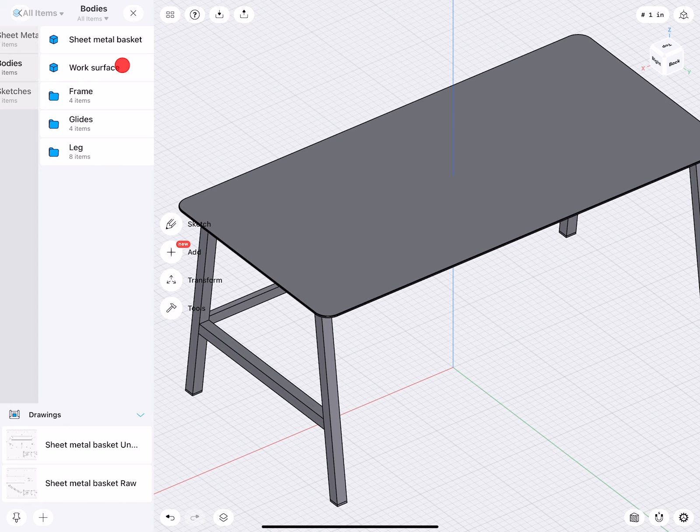Hello everybody and welcome to this tutorial. We'll take a work table like this and under the work surface create a nice and beautiful sheet metal basket. Then we'll make a copy of that basket, move it away, and guess what? Correct, we are going to unfold it.

I'm going to show you in this process video a fairly easy to set up and surprisingly well working manual method for how to calculate and unroll this geometry into a flat pattern. We can then take this flat pattern, load it into the drawing, and send it out to a metal shop to create a physical representation of this digital design. And all that, of course, in Shapr3D.

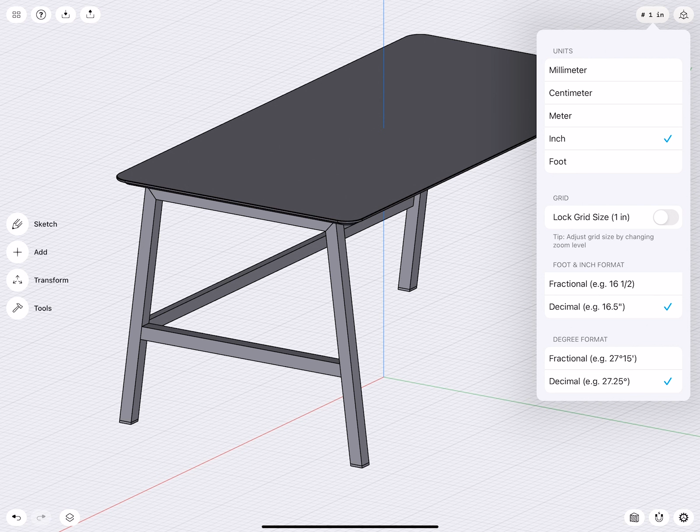So here we have the simplified model. As you can see, this is just the table without the basket, and all the sketches are gone, so this is a nice and clean design to work with. The unit system is in inches, since this design was made in inches, so it makes sense to remain in that unit system.

I will turn on all my snapping elements, and we would like to start by going to the right view, centering our table, and then we turn on the section view, because now I can see through the table. I would like to have the metal basket on the left side, being flush under the table surface and running along this metal frame that sits under the work surface.

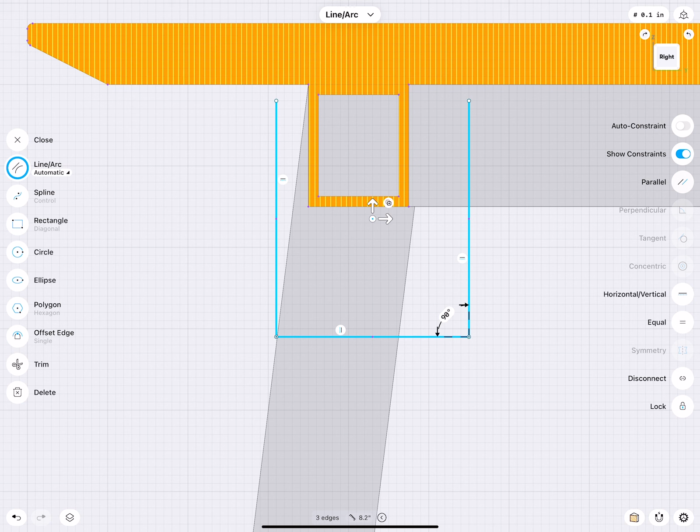Somewhere I start drawing a few lines like this. I can select these 3 lines, make them horizontal, vertical. They all should be 4 inches. I select them all together, say equal, and say this should be 4 inches at this dimension. Now I can bring this into position.

If you take a look at the geometry of my cut section of the table, you notice that after we started drawing our first line, we started getting these interesting magenta points. These are snap targets, where the sketch intersects with the geometry, and there I can snap to this point.

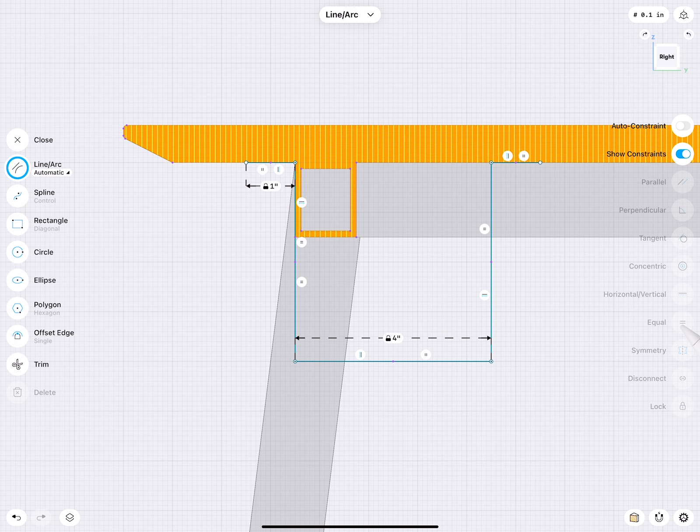Perfect, easy positioning. One line to the left, 1 inch. Very good, one line to the right. Both lines horizontal and vertical, and both lines being equal. Very good, perfect. So now we have the position of our first sketch created.

This sketch defines the inside surface, so we need to create the material thickness. For this exercise, we try to work with pretty thin metal. So we go to Edge, select all 4 lines, and then we extrude this out by 0.04 inches, really thin. Come back to line, and then we close this.

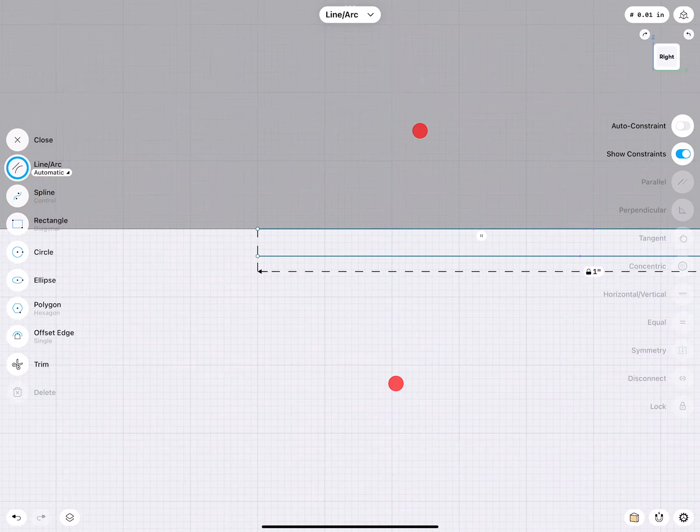Beautiful. By having this sketch now closed, what I can do is go into a 3D view, turn off the section view, look from below, zoom in, and select the sketch profile. There we are, and then extrude the amount of metal out I would like to have.

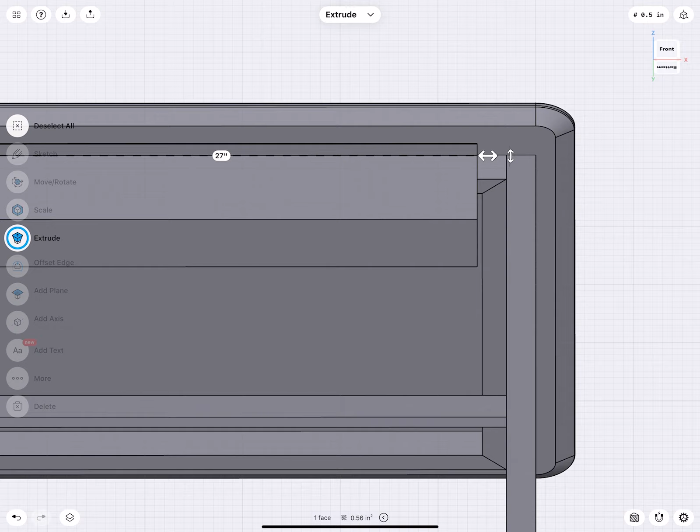Here this would start hitting the metal frame, so let's say this should be 26. Very good, let's do the opposite side. I select here the face of the basket. So 26 multiplied by 2, that's 40... 52. I just enter the number. Beautiful, so there we have the basic basket, but it's solid.

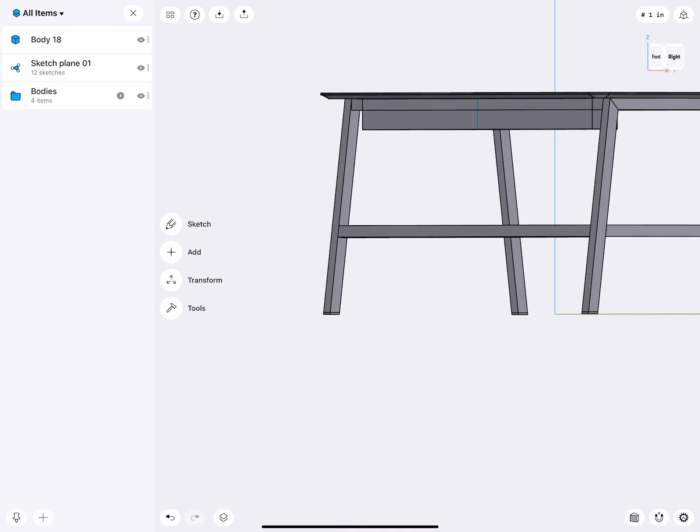I need to have openings. With the openings, because this is also folded, we want to make it from the back nice and stable and from the front nice and accessible. So before we continue, let's make sure that our metal basket and the sketch are outside the bodies folder. And it is.

This here is my outside face. I will select it with the pencil, with the finger, double tap. I can zoom onto it. If I want to turn on section view, then I can look through it. And now I can do the following.

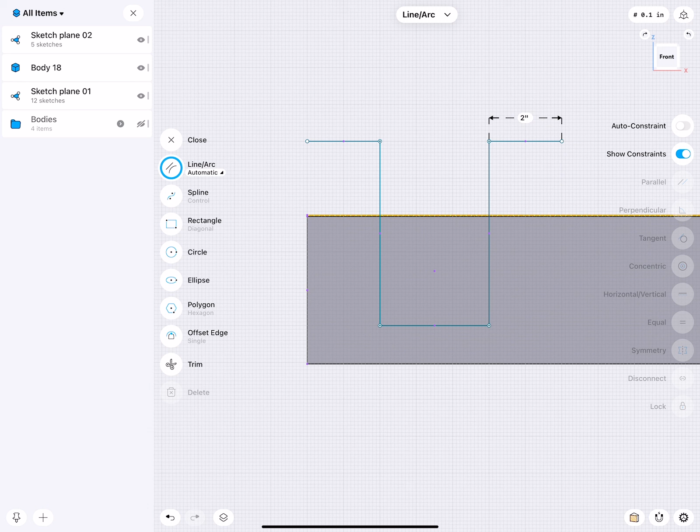How much is this? This is 1 inch. So I will draw here a line 2 inches in, and you see that this lines up with the left edge. Then I can bring this down, bring this over, bring this up, 2 inches over, bring this down. Very good, bring this over, bring this up, and 1 inch, 2 inches. This should be.

These three I can all say equal. Very good. This point here I do not want to move, so I will lock it. These two lines I will make tangent, so they are at the same level.

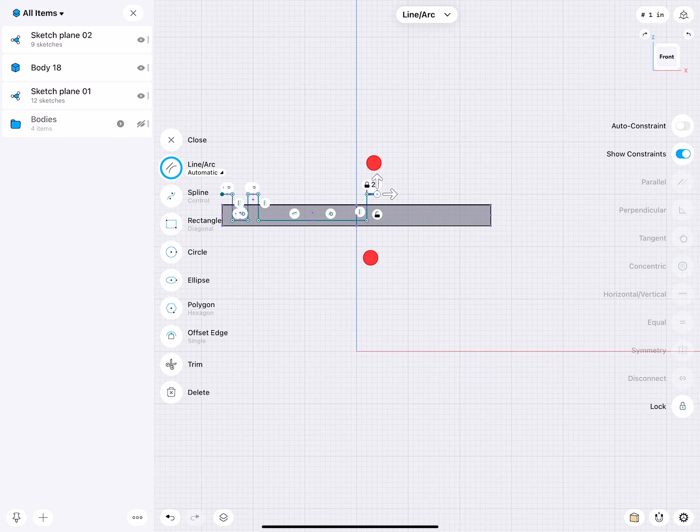Now this point I will move over, and before I do this, let's actually undo the step. Select everything and make sure they have horizontal and vertical constraints. Now when I bring this over, this deforms correctly.

Also here, because I work with nice clean inches and model along the grid, I don't need to project an edge from here into the sketch. I can simply use the grid and align this perfectly, like this. This is good.

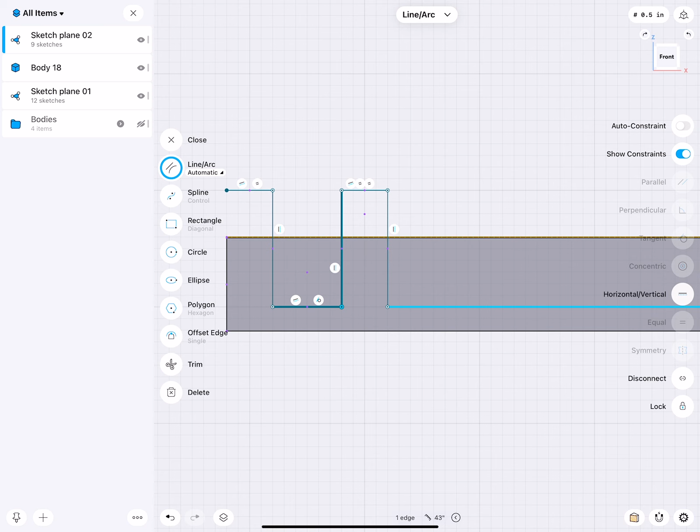So when the 3 top lines are 2 inches, it's actually defined. I can select these 2 lines down here and simply say make those equal. And by doing this, as you can see, beautifully, it's centered, everything. That's a really effective and nice sketching trick.

So this is done. That is actually really good. The last thing I will do is I will add a line here and a line there.

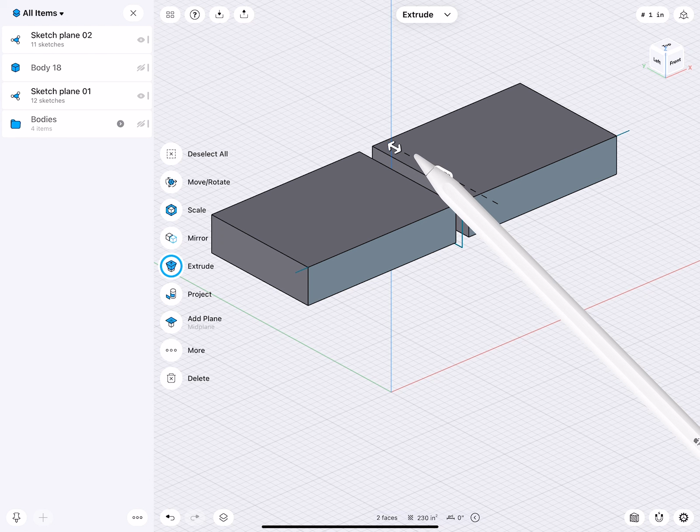Main reason for that is I will turn cut section off, and I will turn this body off. Then I will select these 2 faces, extrude them out a little bit, and push them over to there. So this is actually much wider and runs through the basket, as you can see. Very good.

Now, let's give objects a name. We call this sheet metal basket raw.

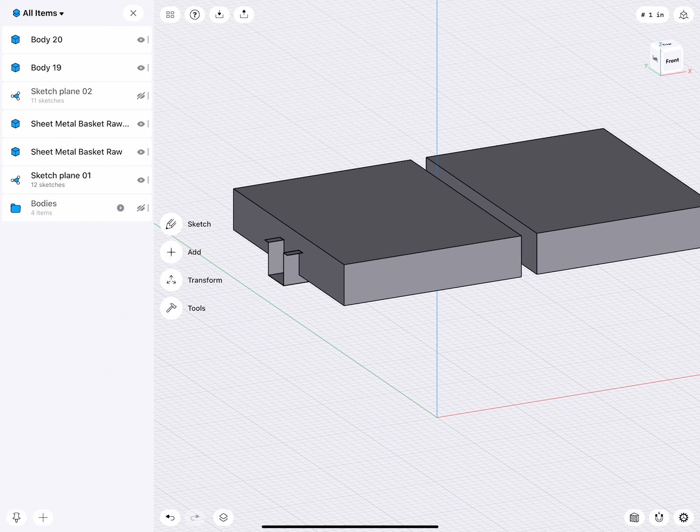Very nice. Okay, so from this piece, I would like these 2 objects to be removed. So we can go subtract, keep bodies, and actually keep originals all, and click done. So here are my 2 elements that did the cut. Here is the raw piece, and there is actually the piece where we cut everything from.

And we can change the name simply to sheet metal basket.

Very good. Okay, nice. All these elements here I will select and put for the moment into a different folder. Just call this sheet metal or however you would like.

So again, this is the outside and then this is the inside. And now this is a design question: how many of these vertical posts do I really need? It's also pretty thick material.

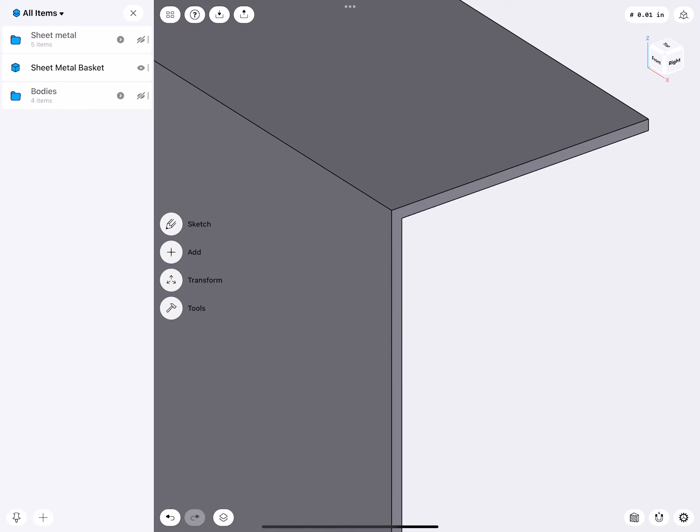Maybe what I will do is I will select this face and extrude and clean up the center part. So from the inside, I have a much nicer and bigger open area, easier to access. Very good. Yeah, that looks pretty good.

Okay, so what's the next step? We can actually add a few roundings. When this has a material thickness of 0.04, let's do the rounding then here too, 0.04.

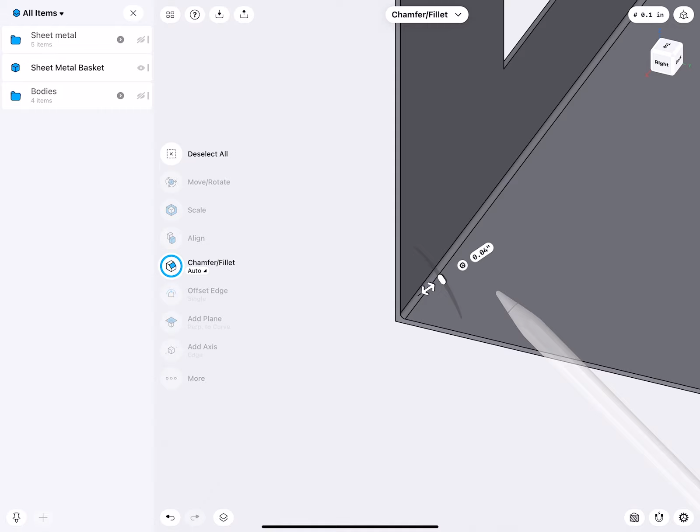So we make a small crease, not too big. Let's do the same here, 0.04. And then that means that this one is 0.08. That's the inside radius plus the material thickness.

Okay, very nice. Do we like this? Let's see. We make this 0.08, a little bit bigger. Then this would be 0.12.

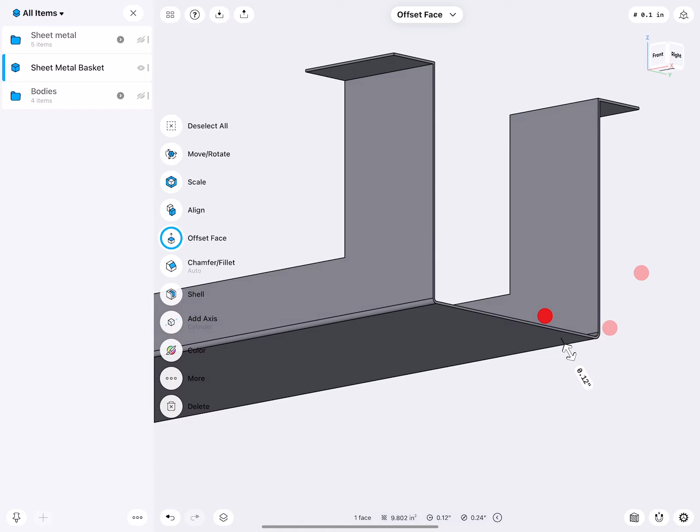Maybe this looks nicer. Keep in mind this is metal, and we can actually bend this not necessarily around a super sharp corner. Oh, we can, but then it's very sharp. We want this to be soft. So then, because we did this at one position, we have to do this also on all these other positions here.

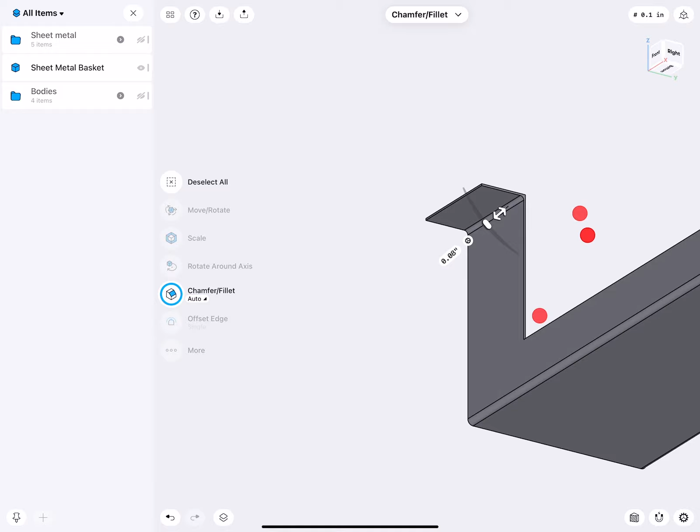0.08, there we are for the inside. Same here. I try to work in tandem, meaning I work on edges that use the same value, and now I'm going to round these edges which will have the bigger value.

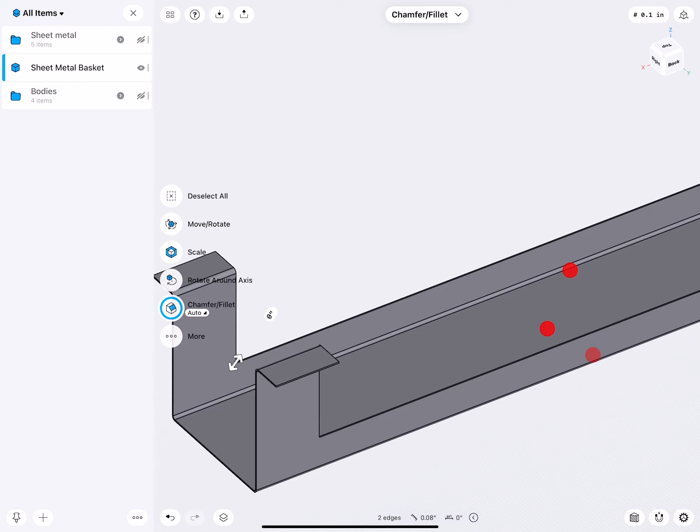Very good. Okay. This is a little bit of a cleanup and styling, particularly with metal here. Sharp corners are not necessarily that good. We will round those a little bit.

So you see, 3D modeling, sheet metal is quite fun and easy. It's very step by step. Let's give this an inch of a rounding. This is too big, half an inch.

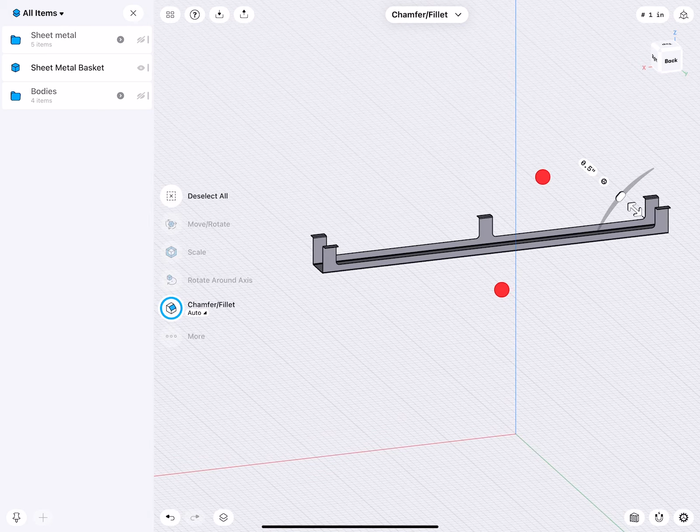That's the beauty of 3D modeling in Shapr with the direct modeling kernel. We can adjust everything so easily. Very good. Okay, so this piece nearly is done.

Now we need to figure out also how do we mount this. We have all these faces, and on these faces we can create a sketch. So I select this face with a finger double tap, and because this is a rectangle, it finds actually the center point. Go to circle and add a nice big rounding.

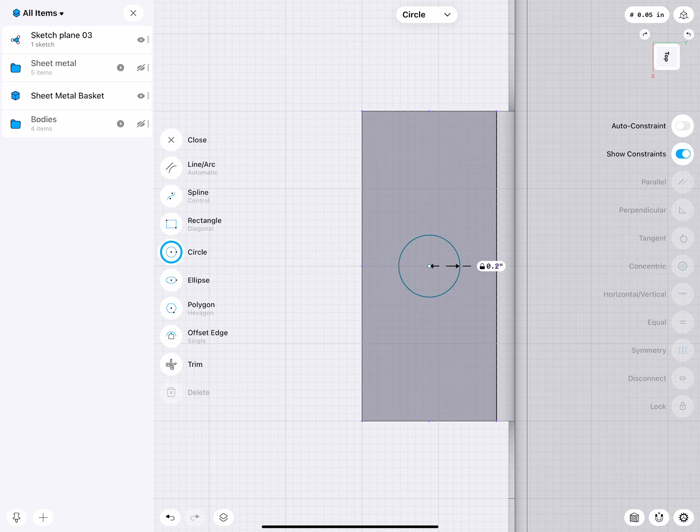So here the question now is, how big do I make this hole? This is a big tip because we're dealing with sheet metal, which bends on its own. It's not razor sharp like a block of steel which we mill with a CNC into a very precise shape. So we want to build in a little bit of tolerance. 0.16 of an inch is actually not too bad, but we can make this a little bit bigger. 0.19, or let's go with a clean value there. A little bit bigger. Obviously the screw that goes through it is smaller, but this gives us a little bit of wiggle room.

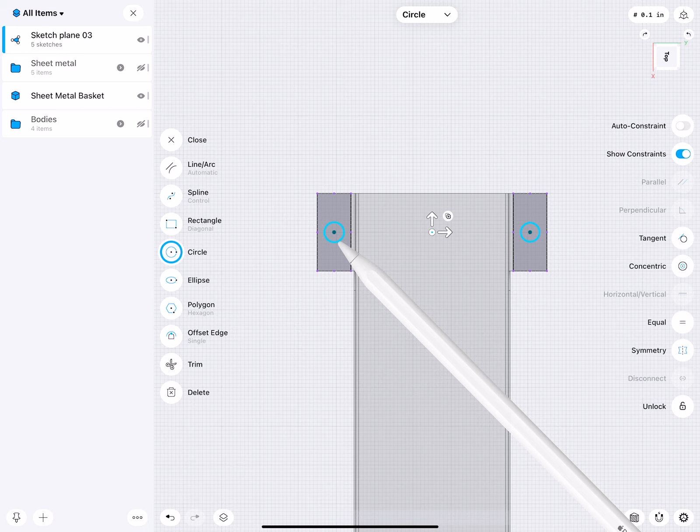Okay, so here now we can go ahead and do the same. There we are. All these rings, by the way, I can lock, so I can't really change the position. And to make designing nice and easy, I set them all to be equal. Then here and there, lock, lock, and then these two, I can go to here and also say equal. So when I make this 0.1, you see they all update too. Pretty nice, no?

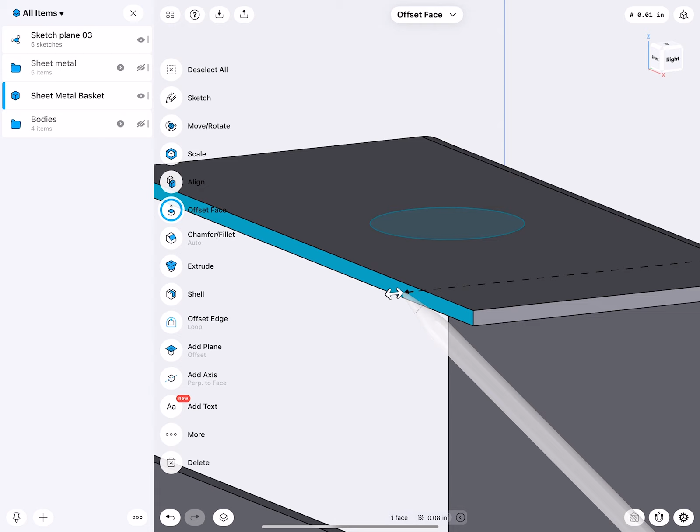What about 0.25? That is definitely too big. Okay, so this should be enough material to actually hold this basket right under it. This is a little bit wider on the side. Here, this is actually pretty good. We could extend this if we want, this is up to you, because only because we made one sketch doesn't mean that we are stuck to it. We could move this further out, but I leave this where it is.

This feels pretty good. Okay, so with these circles, we can select them, and as you see, select the fill with the pencil, push down, and I extrude through the sheet metal and cut the holes. So easy, it's really nice. And then here, the sketch, I can call sheet metal holes and put this one into there. Very nice. By the way, here's a little tip.

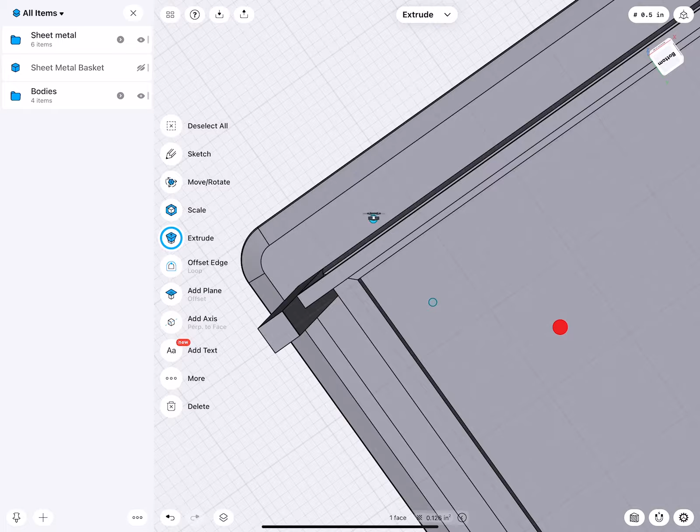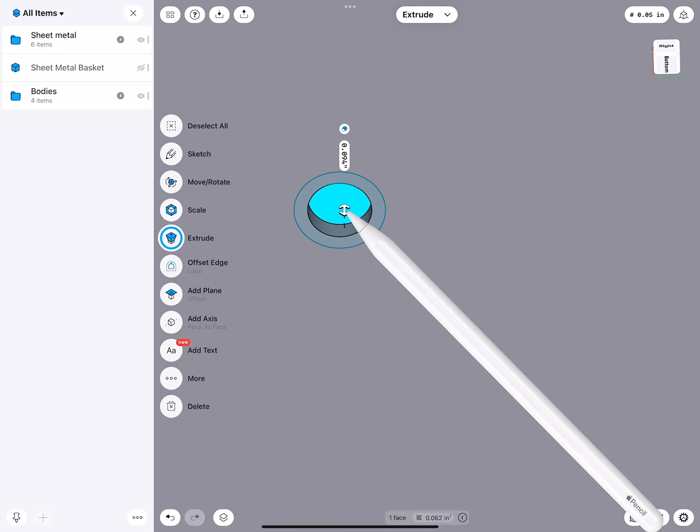Because I have these sketches, I can also find the positions under my work table now and do holes right into there too. Now this is not a very thick work table, so ideally I want to have some sort of socket where I can put a bigger screw and thread it into it. But I think this is very good to know that I don't need to find new positions. If I would like to have a smaller hole, I could simply in this sketch create a new and smaller ring, maybe for a drill hole. And then this one I select and cut into my work surface. So it's kind of like one stone catches two birds. Sorry, birds, I love you.

Okay, very good. So what else can we do now? The sheet metal basket is basically done. And I mentioned that I will show you a manual way how to unfold now this construction into a pretty precise format so that we can put this into your drawing. This design I will select, double tap and make a copy and move it somewhere else. And then I bring this one to there. Very good.

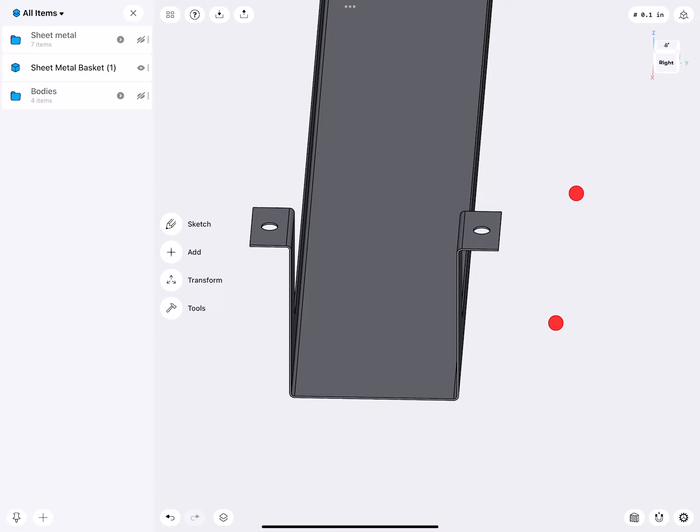Very nice. So the task I have now is I need to figure out how do I have to unfold it. And when I unfold it, I will have flat surfaces. That is very good, like here. And I need to figure out where is actually the crease, so where is the midpoint over where I'm going to bend something, and what's the bend allowance. Now, for example, here, bend allowance - everybody who's familiar with sheet metal will understand what this means.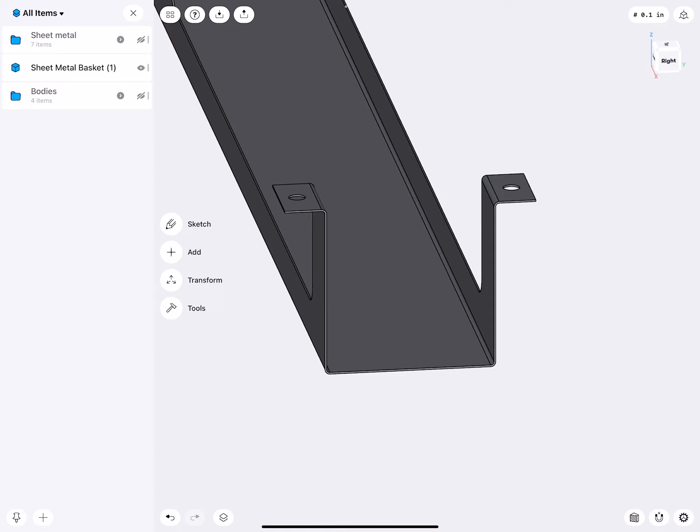And there are methods to calculate it, but because this is such a thin material, you could, but honestly, once we actually take sheet metal and start cutting and stamping it, it won't be that super precise anyway. So this process, which I'm going to show you right now, is totally perfect, and it doesn't require actually any higher math, no formula. So what we will do first is I will select this one more time and I make myself a copy right at the same position there. And then I will select here all these edges there, and the same here.

Go to offset edge and offset this by 0.02, so half the material thickness. That's kind of like the center line.

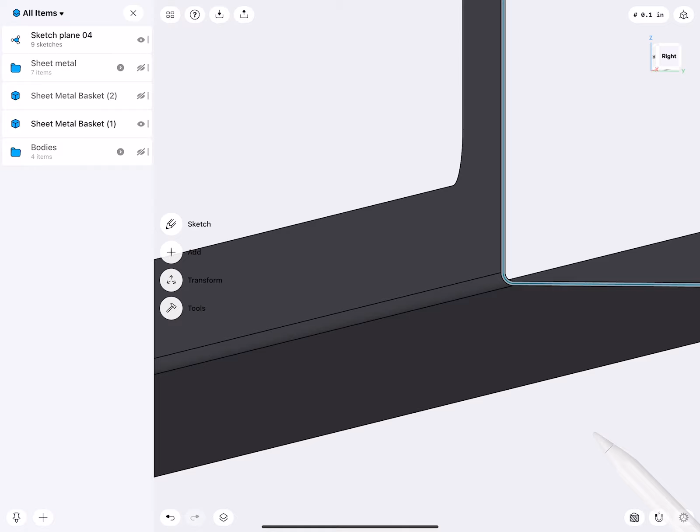What is really useful about this trick is, here now I have actually the length of one piece. Here I have the length of the next piece. And this piece here in between is actually kind of like the length of the sheet metal that is in between the two flat areas.

Here the metal will be compressed and here the metal will be stretched. And the trick is that now this piece needs to be as long plus this radius, or half of this radius on each side. And that actually is really it.

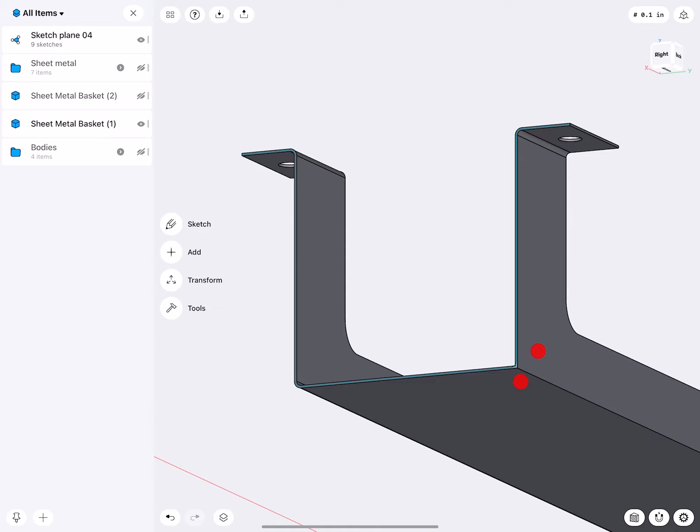Before we continue, however, I need to remove all these carefully crafted roundings we did here. And this goes pretty fast. And there we are. Let's go to here and there. And the last one. Very nice. And here. So, perfect. Okay, good.

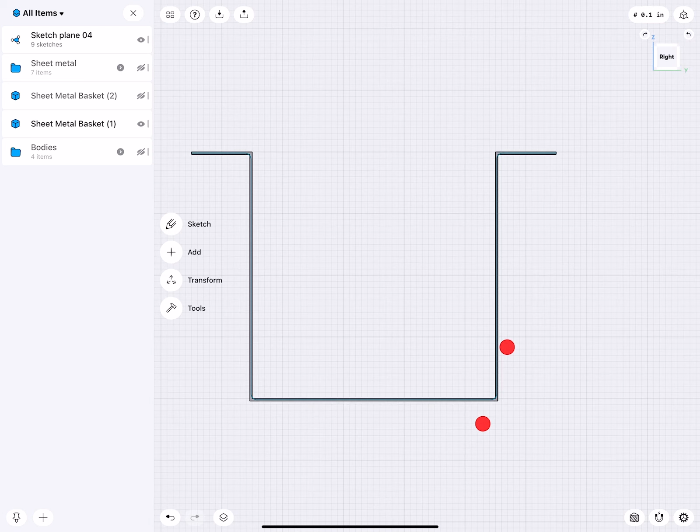In the next step, we are now going to unfold this whole design, and then we need to reposition some of the edges. To unfold it, we can start, for example, here.

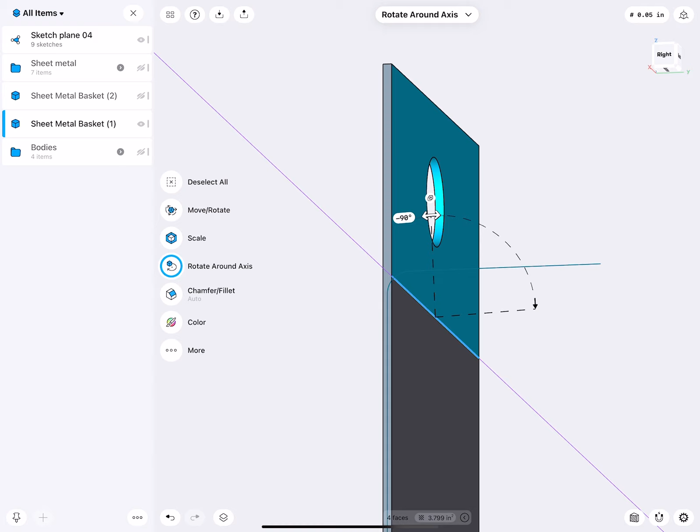I will select all the important edges, so the top, the bottom, the circle, and actually this endpoint. Then I can select this edge and bring this over 90 degrees. Very good.

Let's do this one more time. There, inner edge, and 90 degrees.

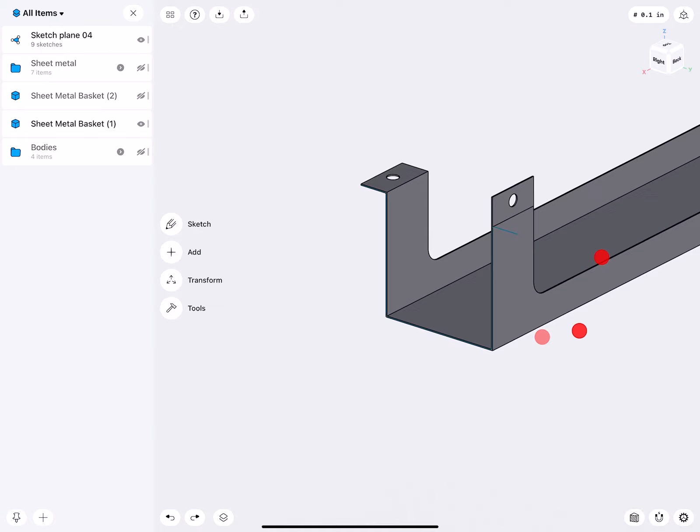Beautiful. If you do not select actually this set of faces, let me show you what happens when we select only this. So there you can see we are rotating these faces, but the rest of the geometry, so the hole being cut, remains in place and adjusts. So that's the reason why it's important to select all those faces.

Then in the secondary step, we have now to unfold this whole piece. Also here, this face I need to select. The fillets, they're probably not really, they will actually move with it. We don't have to really select everything, just the important faces which could deform.

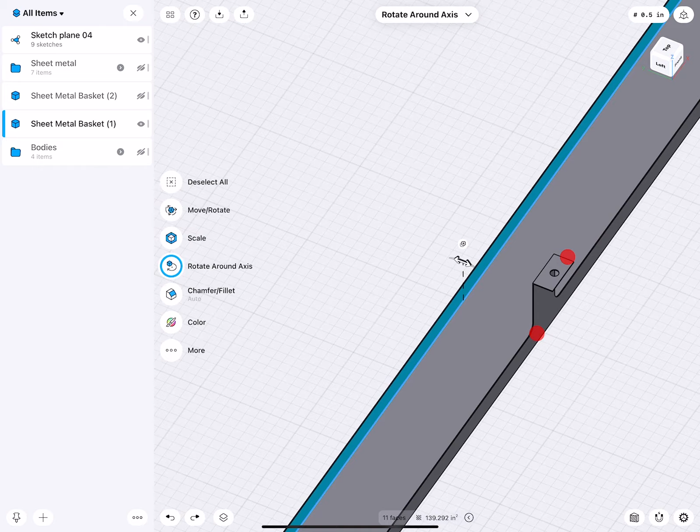Now to figure out what actually we have to select, you will see once you rotate something and it does not rotate or unfold the way how you expect. So what about this? Yep, this actually works really good. Beautiful. There we are. So this was actually part one.

Let me very quickly do the other side. It's actually a very good practice.

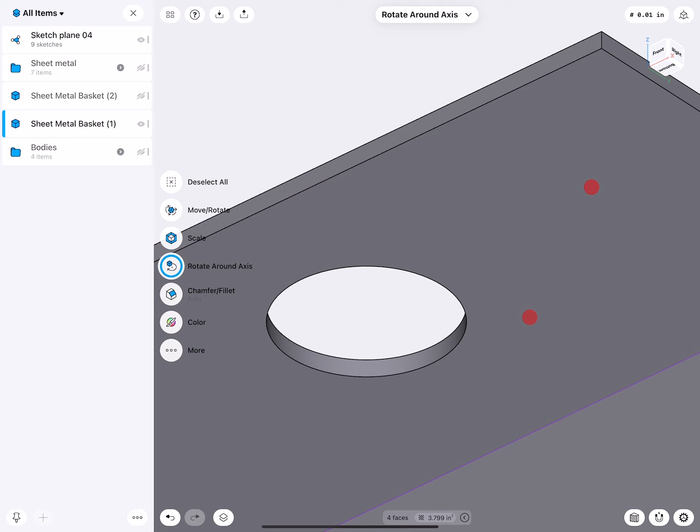There we are. And now this one. Oh, be careful with how you select your pieces. This should be 90. There we are.

And then we select everything here one more time. Go to here, select everything there, including this face too, again.

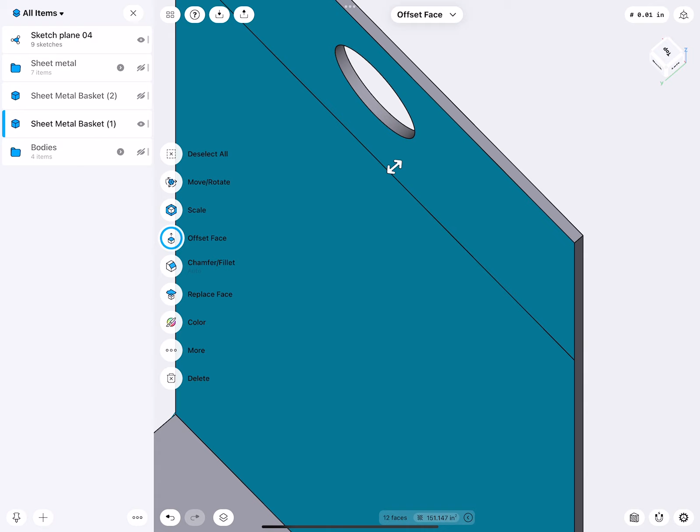And you see me zooming in and zooming out a lot. That actually is a very useful process, so when you select something with the pencil, not by accident do you select something you do not want to.

Oh, so there actually I got an error warning. That means somewhere, by the way, I did not select everything correctly. There. Very good. So we have actually now the piece flat.

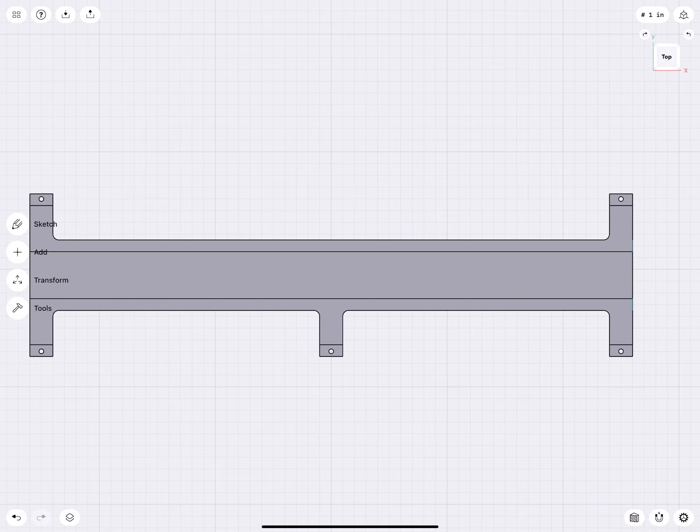And now we need to figure out how do we have to reposition some of these edges, and what does actually edges mean? You see, when I zoom in and I turned on the show hidden edges, here's some of these edges, they are not at the same position.

And because this is sheet metal, material being stretched and compressed, this will grow along here and here just a little bit. And we'll show you now how we can do this.

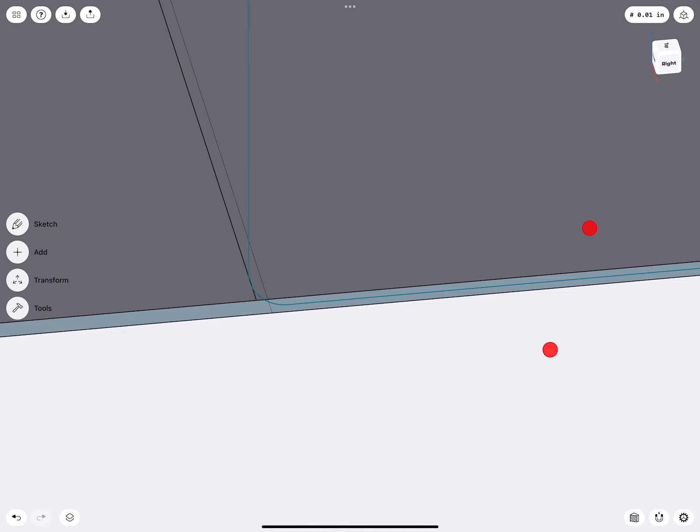To do this now, we will go back and take a look at our sketch here one more time. So this tells me this is 3 inches and 84. And then here, this arc has a length of 0.1507 inches. Okay, good. So how ideally do we do this now?

I will select this face because it's going to be the easiest one with a finger double tap. Then I zoom in a little bit. And then here you see there's a midpoint. I draw a line there. There we are. And then I can actually find the midpoint.

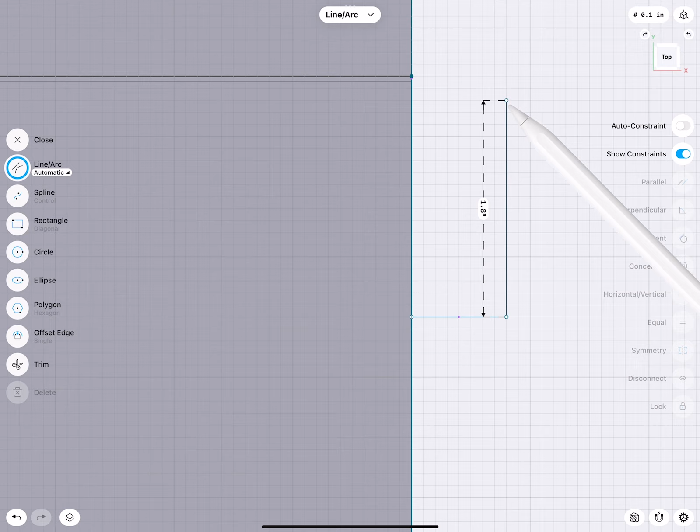And from here now I draw a line. There I draw a line. These two pieces I make equal.

And what I will do now is I will select this line, 3.84 inches. Very good. So from there to there, 3.84 inches. You please stay horizontal, so I might have to move you back.

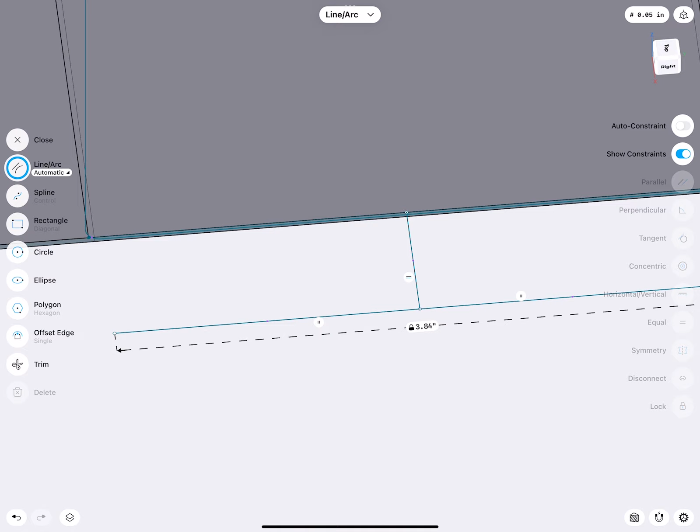There. Very good. Okay. And then when I zoom onto here, select this arc, the length of this arc is 0.1507. So that divided by 2, 0.07535.

So we go to here, add a line.

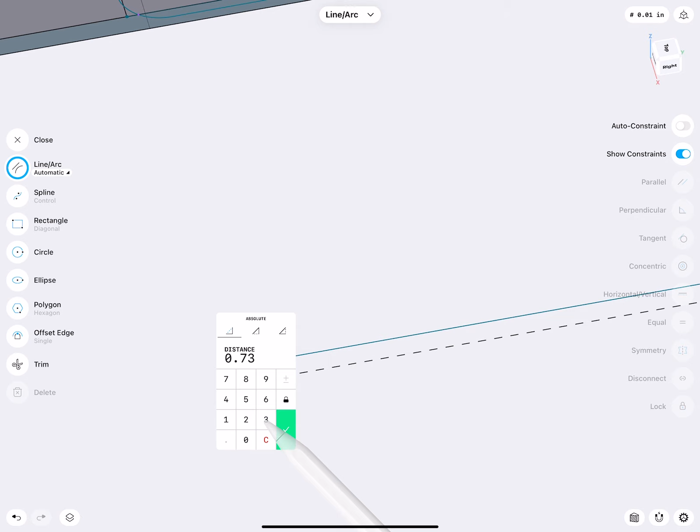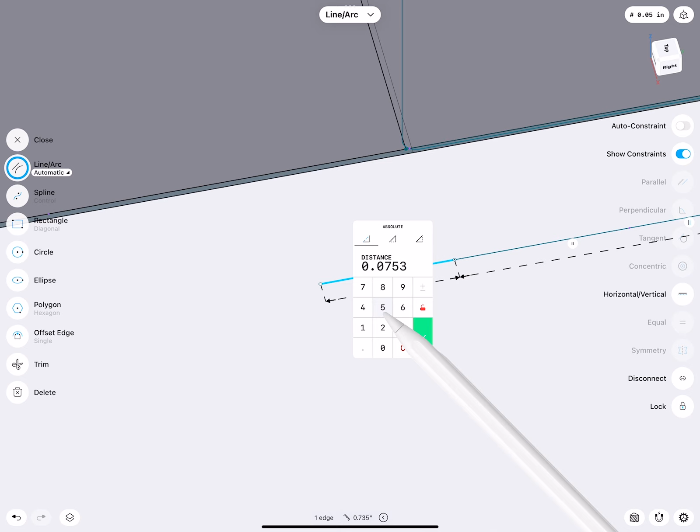And make this horizontal vertical. I have to verify this number one more time. So this will be 0.07535. Okay, very good. Or as you see how it rounds it, let's simply call this 0.075.

Very good. Okay, so we will do the same here. Another line, 0.075. Vertical, horizontal. Another line. Same length, by the way.

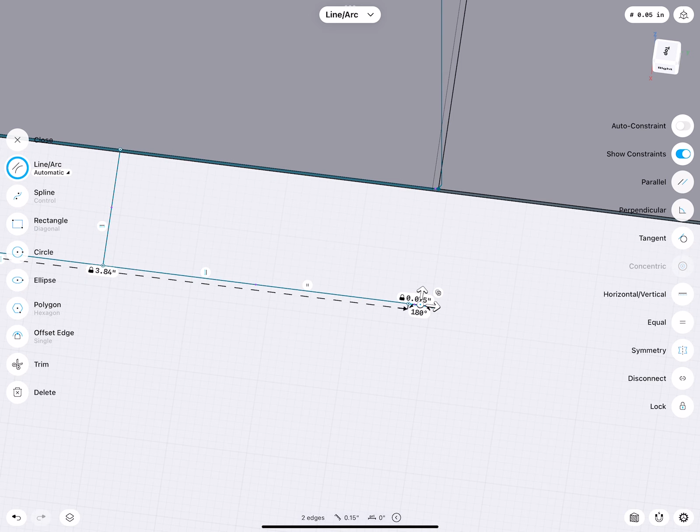And this is actually now my bend allowance. Very good. Another line. Horizontal. How long is this line? 3.8 inches. Very good.

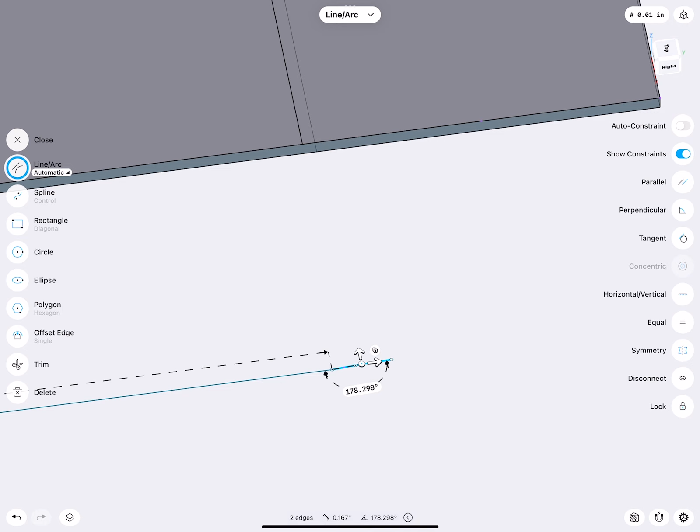You see this actually kind of like the same. So .8. There we are. And then we have one more bend on top. So we will do one line and another line. We make those horizontal, select both, and I will select the line here with the dimension and make this equal.

Very good. And then we have to add the last piece, 0.88. Very nice.

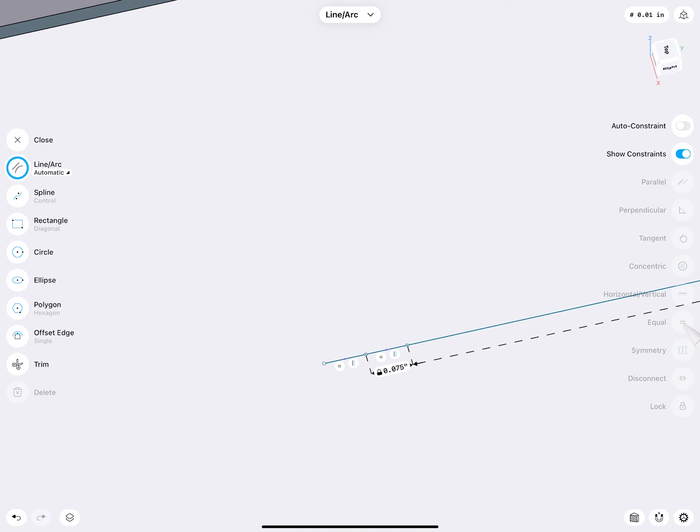I will do a very quick process. So you and you are equal. Very good. Then another line, another two pieces in there. I know actually 0.88. All those will be horizontal, vertical.

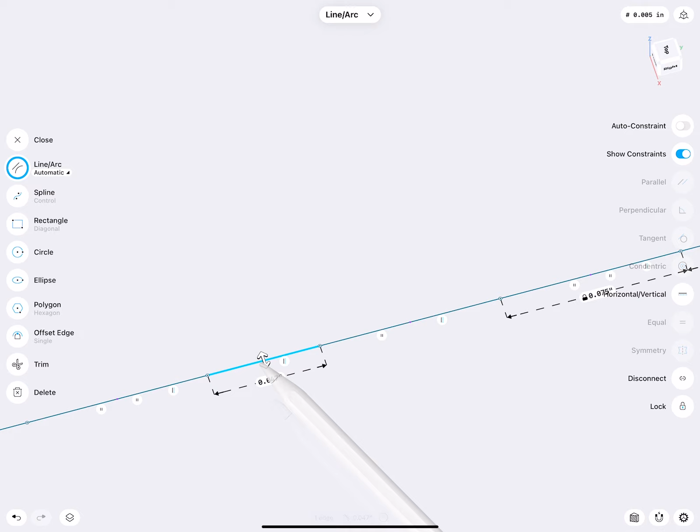These two elements here, U and U, to this one and be equal. There we are. Here is actually now the small piece that is left. That's actually the longer piece, which would be this one, the 3.8.

Very good. So you saw a little sketching shortcut by using the constraint system. Okay, very nice. So there we are.

Why did I actually do this design? So one more verification, 3.8, that is correct. Then this is actually 0.88. Let's select

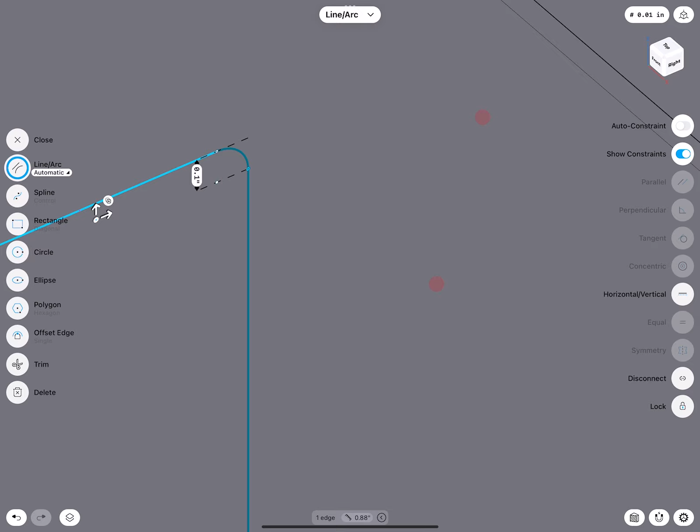all this there and here and there. Very good. And there, and that is 13.82. Pretty close. Okay, very nice.

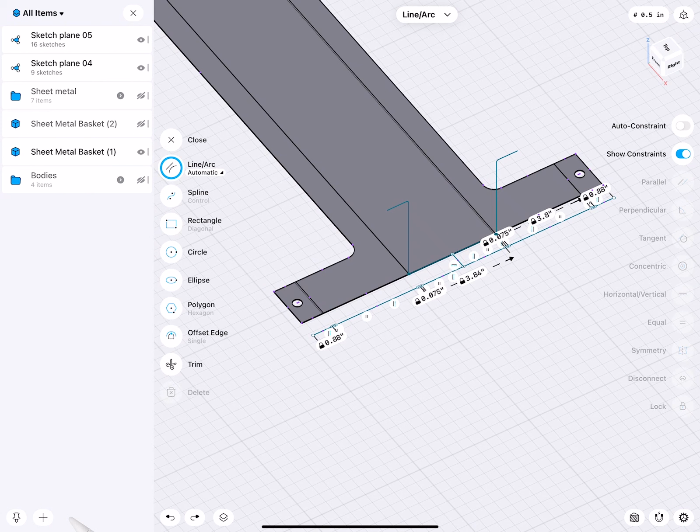So now what I will do is, this sketch is a little bit confusing, so I will remove it. I will come back to this view here. I have to do the following now. I will draw myself a line, and I always draw actually here a line from a sketch point.

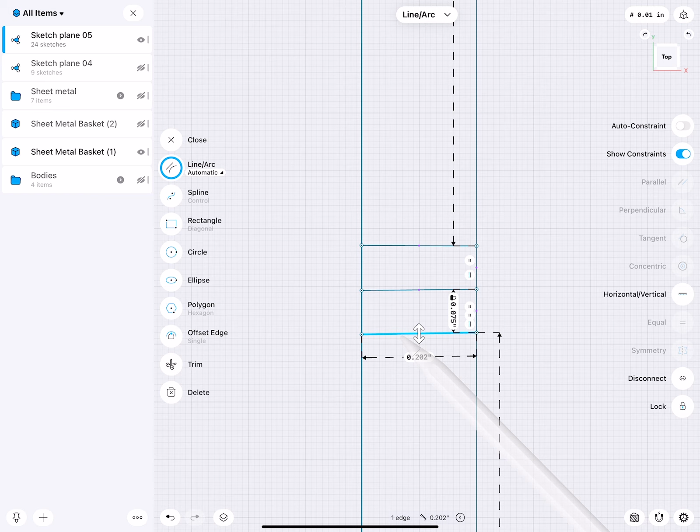This way I continue drawing actually on the sketch. These three lines here I make horizontal. Then this line I will continue pulling down. There and there and there. There we are.

Go to here. I'm going to create myself a nice sketch overlay so I can see where all my surface or solid edges actually have to be. There we are. And now I can select this line and nicely drag it over to here. So I have a perfect, beautiful overlay.

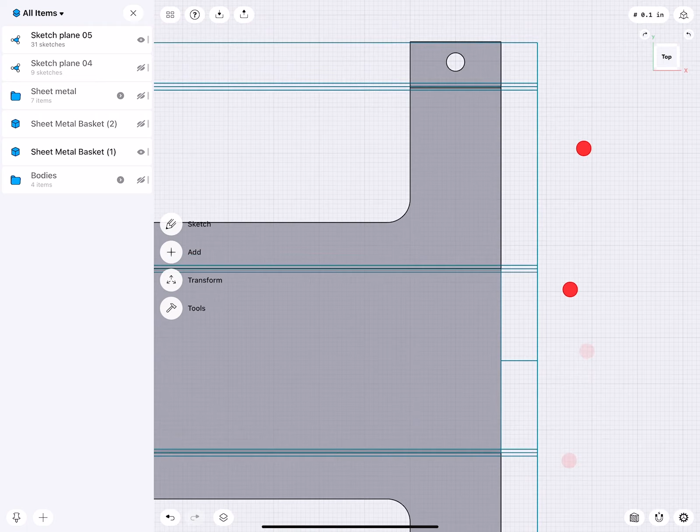Very good. So now actually I have the pleasure that I can make sure I have show hidden edges turned on. And all I need to do now is, so let's start from the center. So this is the edge here on top. That one is visible. And when I say visible, visible actually in the drawing.

I go to here and I could measure what's the distance to here. So from there, so there to there, what is really the kind of like the distance? 0.005. So that means if I want to, I can select this edge, go to move, minus 0.005.

Okay, so that one snapped perfectly. And then here to there, what's the distance? Okay, no, will be the same, .005, just the opposite direction. This edge is actually on the bottom. I can do the same precise work, or if I want, well, I don't actually necessarily need to, but I can just zoom in and try to align this so it's a little bit under there.

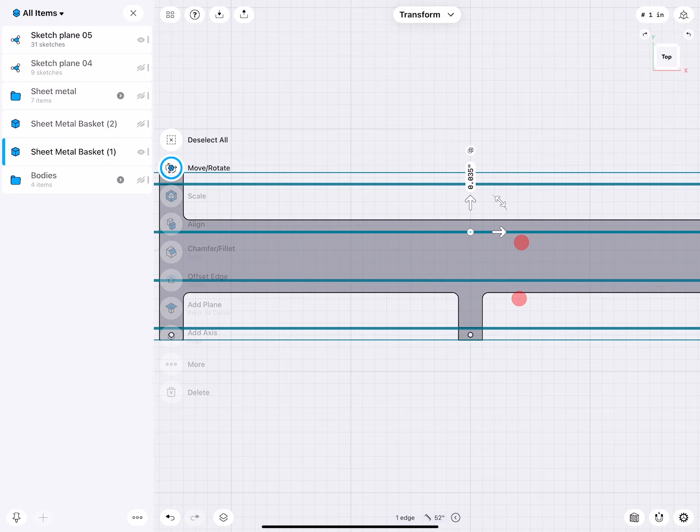So now for the sheet metal, I actually have this face prepared with a correct bend allowance there. So the next step, this is actually more where we have to be careful in this design, if we really want to, because we're talking here about tolerance.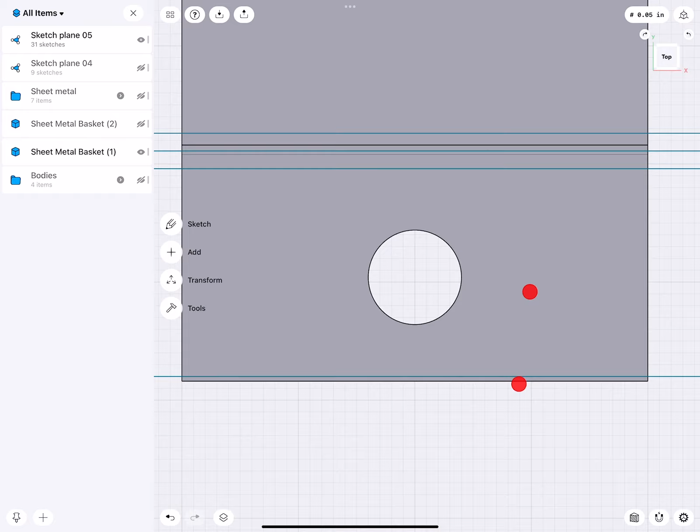So you see where I need to move everything to. This outer face I can select and then use more and translate and push this to there. Okay, so now we have the correct length. It's actually with the face super easy to do. There.

Now, the thing that's important is we need to figure out when we made this a little bit shorter. Essentially, we move the edge in, and we also have to move this circle in. So I will do an undo and calculate here what is this distance. 0.02. Okay, very good.

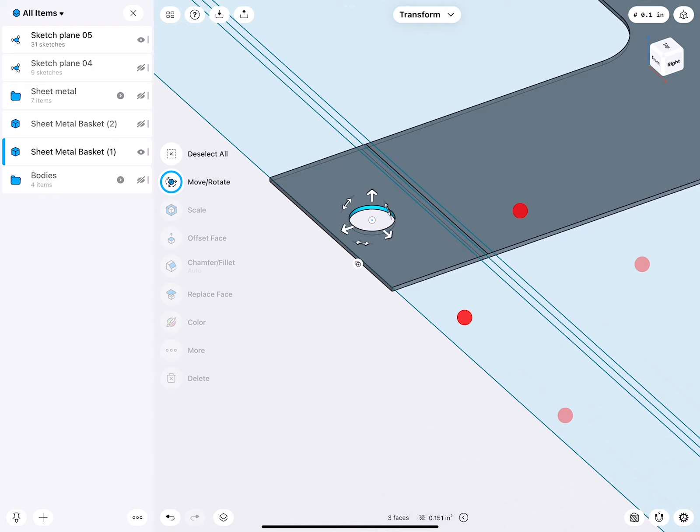Let's reposition this. So that means this opening, and this opening. If I want to be very precise, I simply have to move to the right side minus .002. Okay, so that was a very small movement, if you want to be that precise.

We can also select this face, this face, this face, not this edge, and here, and do a move to. The 3D widget is somewhere here, so I can move this widget closer to here, minus .002.

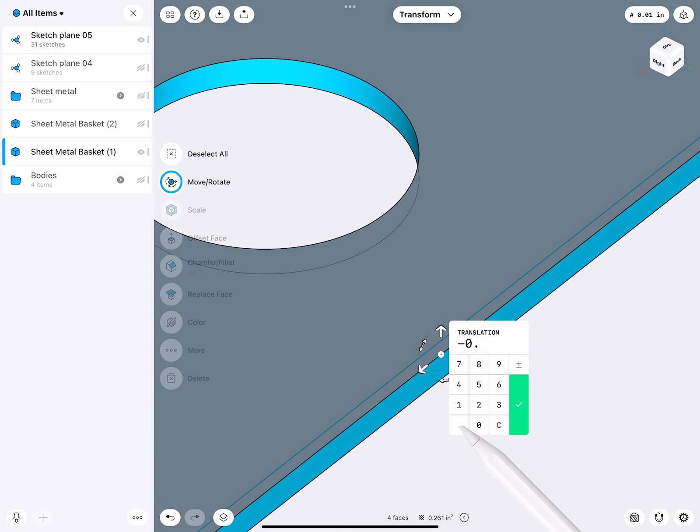Minus .02. I guess I was wrong there. Okay. Very good. So that means here I made a little bit of a mistake. Oops. So .002. There we are.

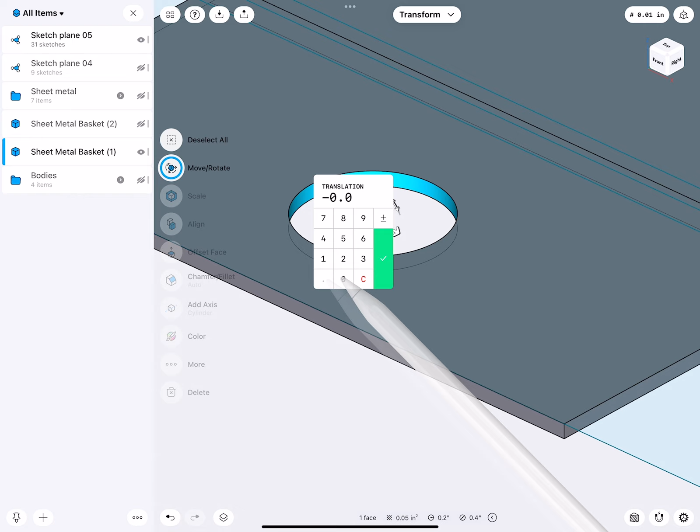Fortunately, this is very easy to fix. Minus .02. And then here the same. We select this one. I could do math by calculating this, or simply move this back and then move this correctly. There. And one more here. And back. There.

Beautiful. So the only step left now to do is correcting these edges here. So here in this case we have .025. Okay, so you will go down minus .025. Very good.

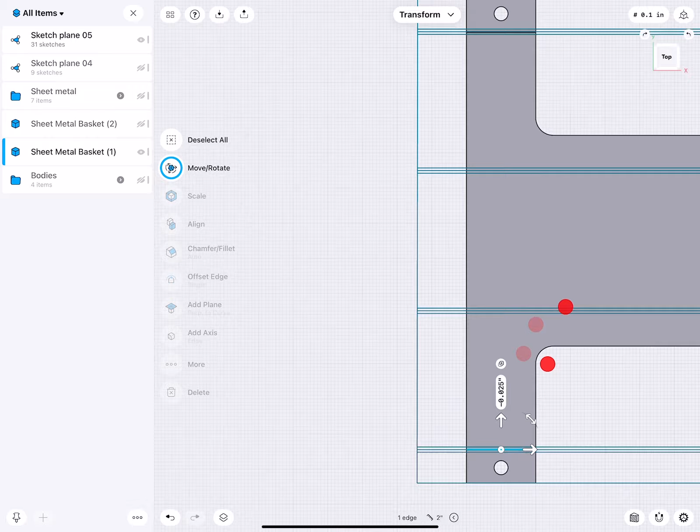Probably here the same. Correct. I will go to the opposite side. You see, when you fold or unfold everything exactly the same way, then even while this is a little bit of labor work, we can take very nice shortcuts. There we are. Here's the last one. Very good.

-0.025. Beautiful. And if we want to work really clean, this is the face in the back. Looks like 0.016.

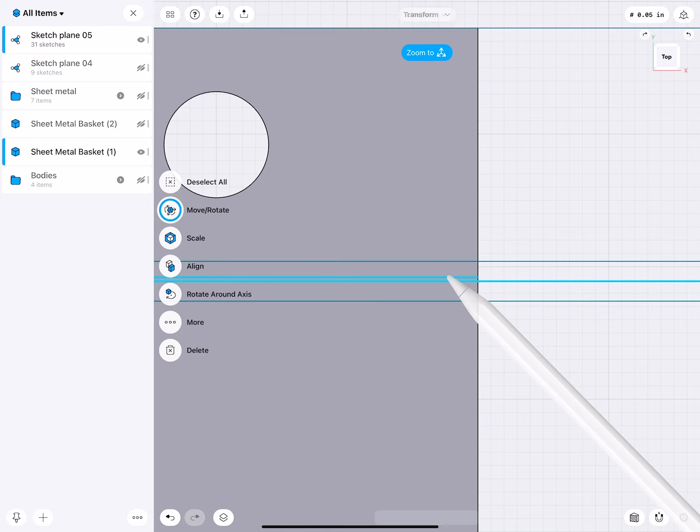And simply move this back edge, sorry. This edge might not necessarily really show up in the sheet metal when we take a look at it without having the show hidden edges turned on. So this task I'm doing here right now is actually not necessarily needed. I simply do this to create a model that is a little bit cleaner. Only the edges which are visible to the front are important. Okay, very good.

There's actually our unfolded sheet metal. Now, this is ready to be put into the drawing module.

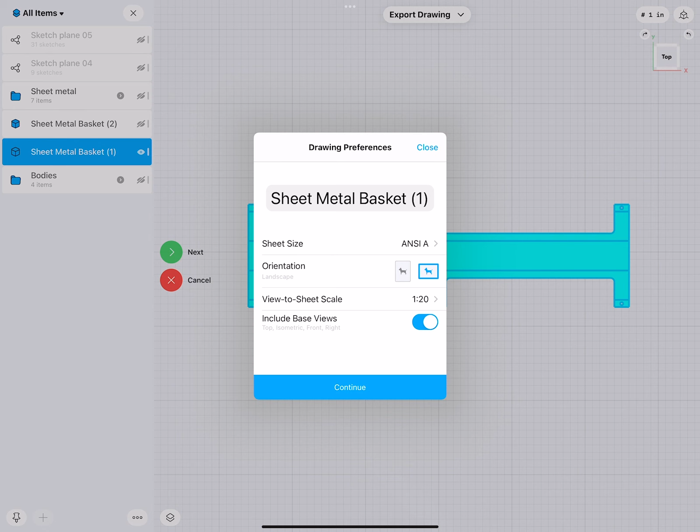To bring this into a sheet metal drawing, we go to Add, Drawing, select the body, Next, and then we can give this a name, sheet metal basket. You select your paper format, etc. Continue. And I would like to add a view. Top is actually the best. Scale, let's see what can fit onto the paper. That's pretty good. Then we can close this.

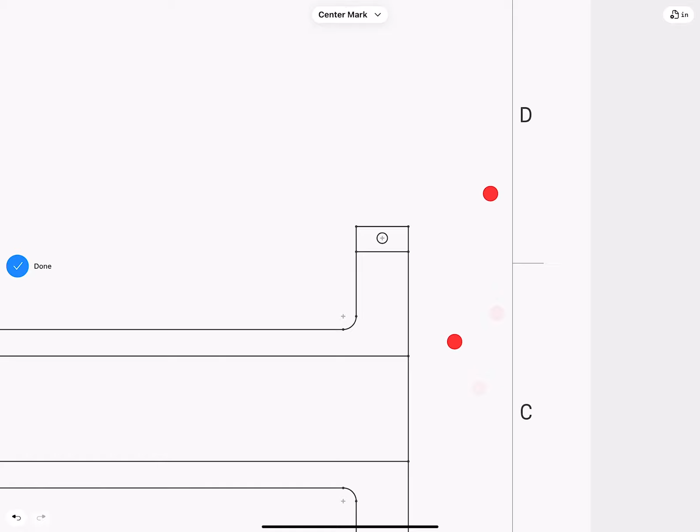Go to geometries. We can add center marks, right at where we have drill holes, for example. There we are.

Basic dimensions. How wide is the piece? How deep is it? These small parts, actually, what is their dimension? And this one.

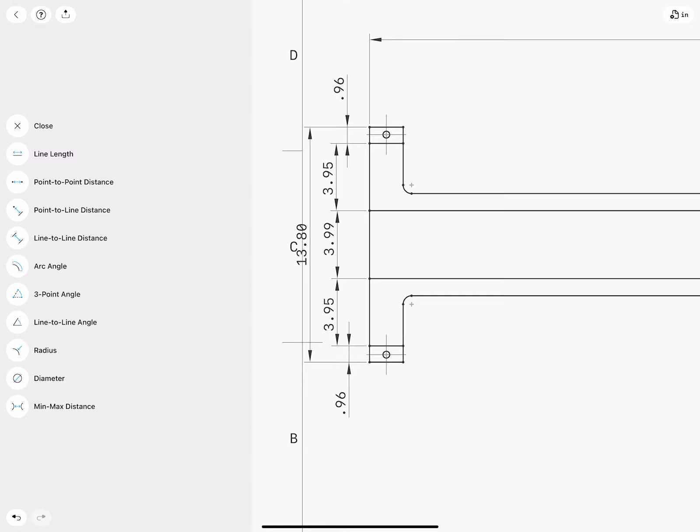And try to make drawings, as a tip, not to be very confusing for those who are not very familiar with it. Try to make the drawings easy to read. And when you have somewhere something dimensioned, you don't need to dimension it again somewhere else. So this whole piece, for example, dimensions all those elements. I could also specify what is actually this material thickness.

For example, here. There we are. And from here to here, what is this distance? Could bring this a little bit closer so I can easily read this. Very nice. Here, how wide is this? And there.

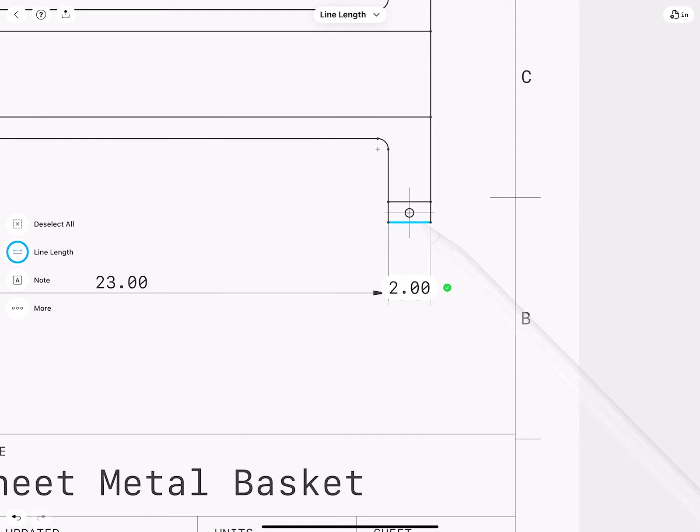If I want, I could add those. Same here. And let's do this there. We could also simply say they're all exactly the same, so we only dimension one piece one time. Very good.

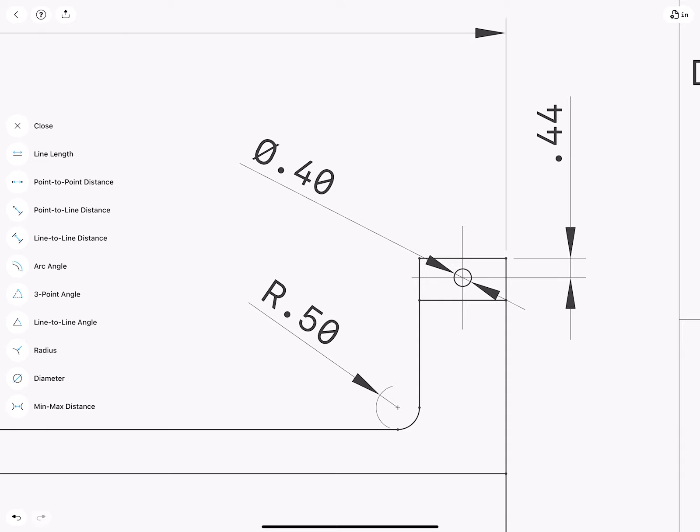Last piece of element, maybe a radius, diameter, or the position of this to here, and the position from here to a side. So we identify the center of this. Maybe I'll bring this to there, and then the .44 I bring down.

Very good. Okay. And that basically sums up this process of how you can 3D model a sheet metal basket, unfold it, and then via taking the measurement of the center, figure out how long pieces have to be, then unfold it, we correct it a little bit. So we can then create a nice drawing like you see here. That's it.